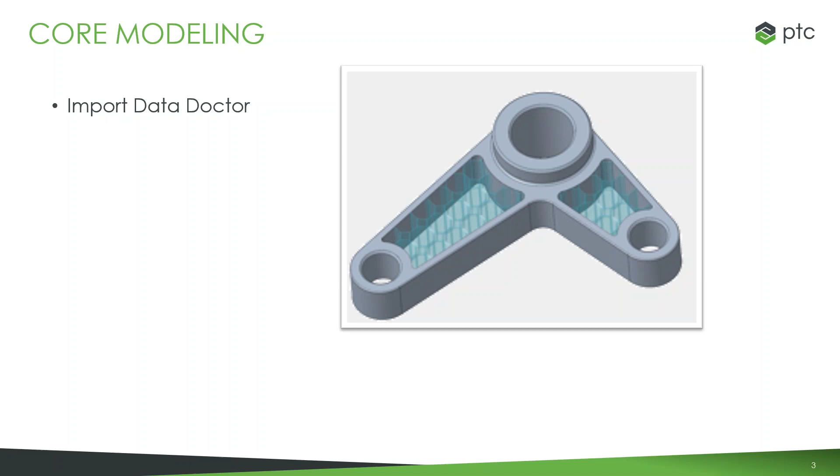We also have new display filters for our geometry representations. This could be utilizing the new multi-body capability we have in Creo now. So if you wanted to, say, display a lattice that you have here in the middle of this feature, and you want to make the rest of it a little bit more transparent, you have a lot of options to do that all the way through your part.

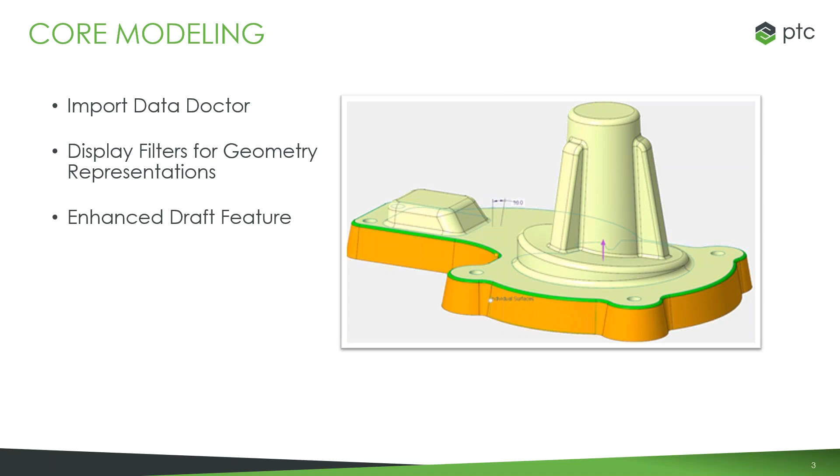We've also made enhancements to things like the draft feature, and that includes drafting already drafted features. So if you have those features already drafted, you can go ahead and draft right on top of them. And we also have the ability to detect existing draft angles in the model, so it's easy to work with and even modify later on.

And finally, here we have improvements to the performance of snapping to model geometry, or even snapping to a grid. Those are different workflows, where if you're working with that geometry and you really want to snap to those edges or certain features, or if you want to turn that off or on, it might change while you're working, so you have the ability right in the quick menu to switch between those if you need to.

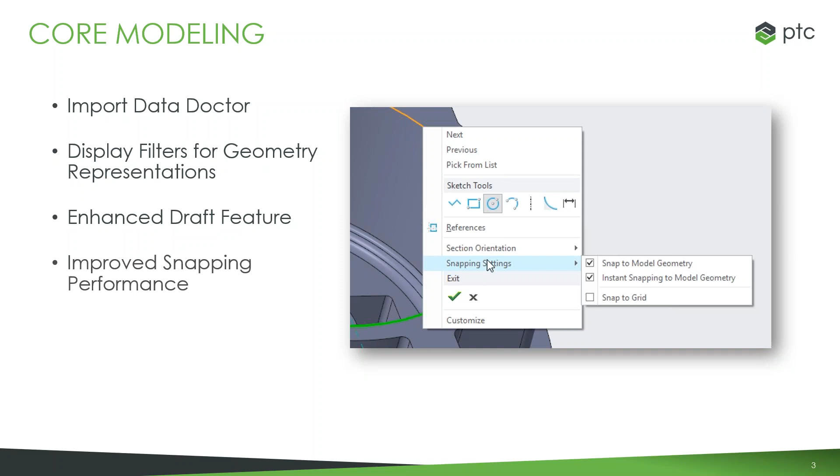And moving forward, we've made enhancements to the mirroring tool in that sketcher. So it makes it very easy to grab things and mirror. You can now essentially grab any straight sketch and use that to mirror about. And if you want to change that sketch around, move around the dimensions, that mirror is going to update for those changes. So you can set it to update or set it not to.

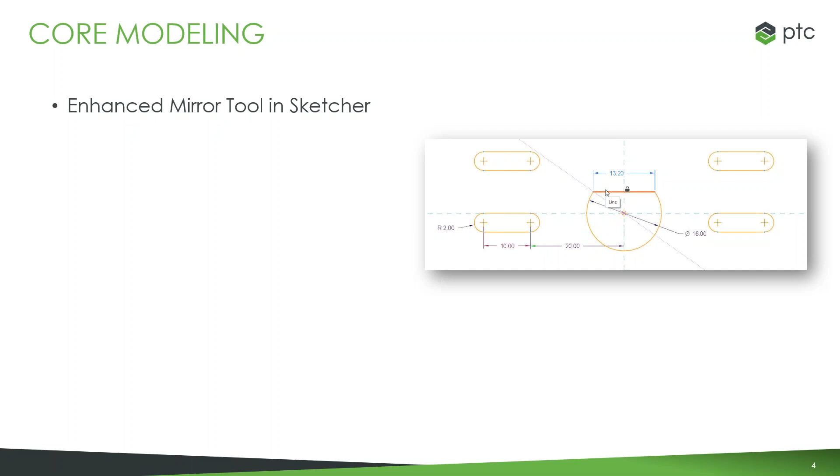We have now improvements to the visualization, just in general, of your design intent in the sketcher. We've improved the look of our relations icons. We're able to highlight certain references, change colors, really just modernizing the look and feel to working in that sketcher to better display that design intent throughout.

And then in the edit dimension section, you're able to set the appearance of your sketcher constraints. So when you click to edit those dimensions, also show the constraints. So that's just a config option that you now have the ability to activate there. So really, there's a ton of different core modeling capabilities that we've updated, but just a couple of them to reference on for you to see a little bit into that.

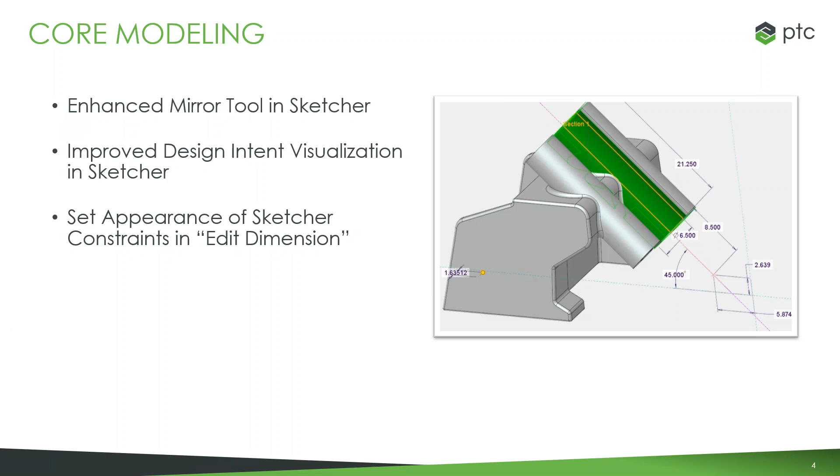But what I want to move in now is to look a bit more into the applications. Starting here first with Creo Simulation Live, aka CSL. And if this is something that you haven't seen or even worked with before, this is a tool that we've developed as part of our partnership with ANSYS to put real-time simulation right into the modeling environment. So it's not some other software or another window that we have to jump over to work with, it's something that's available to us right in the modeling environment.

And this was introduced with Creo 6 and actually backported into Creo 5 and 4 as well. But we've really been working on this and making rapid enhancements to it over the past year, and I can touch on a little bit of that right now.

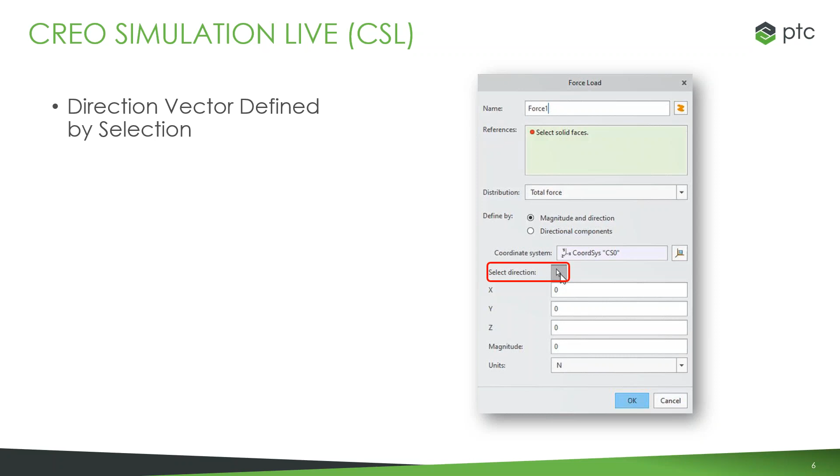First thing that we've added is the ability to control the direction vector from a selection. So it doesn't have to be a default and we don't have to type in all the X, Y, Z. What you can essentially do is, if you want to apply a load, you can say, okay, let me just simply select right on that face or right on that edge or whatever it is, and then it's going to, by default, fill in all of those direction vectors for you.

And building off of that, we're now not locked to working with the overall global coordinate system. You can create and select any coordinate system to define those load cases from, so improving the general ability to define those loads from the start of the study.

Also made enhancements to the legend, specifying what you want to look at, how those values are displayed, especially for setting things like the upper and lower bounds for the values that you're displaying. Works a lot better now. It really works well with things like composite views where you're only displaying values within a particular range on that legend.

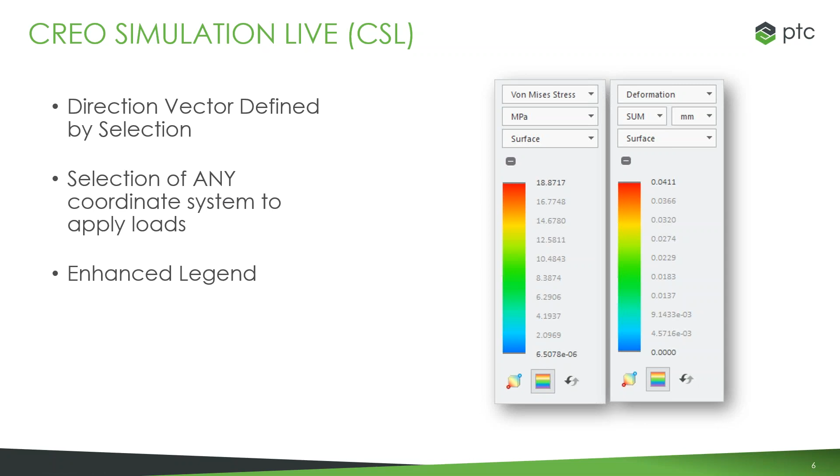So say you're showing your model, but you only want to see values that are between 14.6 and 8.3, you could go ahead and move those down, and then it's making the rest of the area transparent or basically see-through and only showing the values in that particular region. So that's a really useful tool there, specifically when you're building out your designs.

We can also use values that we get from our simulation probes in CSL and use them in our behavior modeling studies. If you haven't worked with behavior modeling before, this is something that allows us to take values like your maximum von Mises stress or the displacement that you're getting from your analysis and begin to kind of optimize around it,

where we're telling the system certain dimensions that it can change, and the system goes through and automatically optimizes the model for us based on what you allowed it to change. So working with those variables, it's a really useful way to use those analysis results we're getting back from CSL.

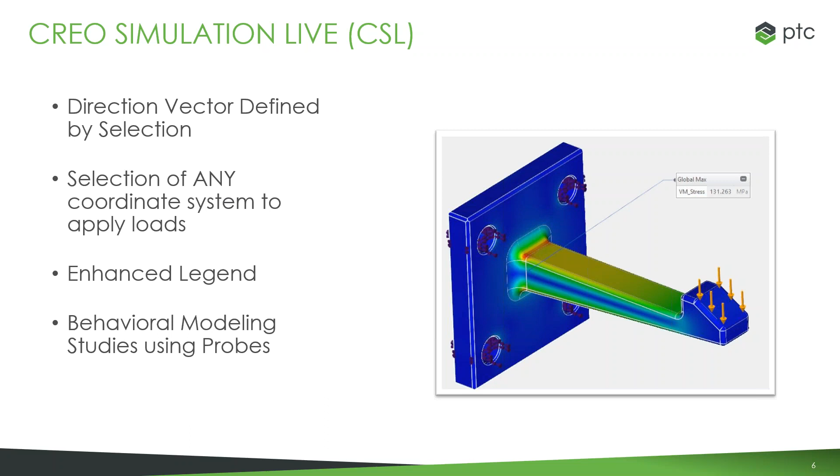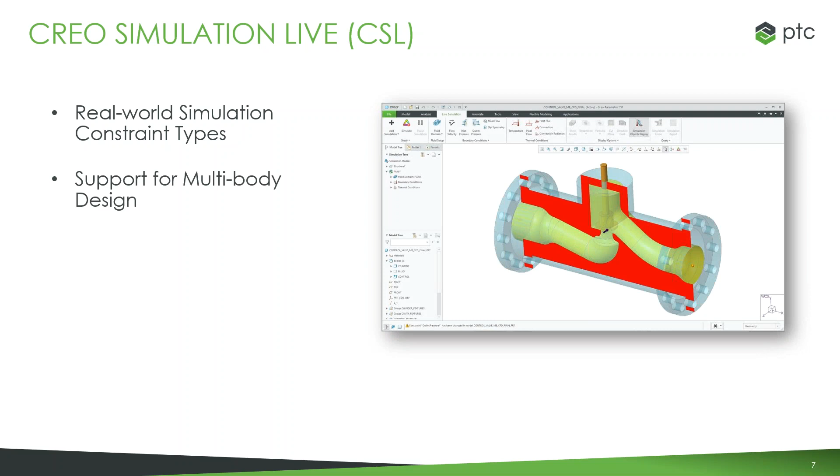We've added more real-world simulation constraint types as well. So things like ball, pin, planar constraints, just helping to make more of those cases more realistic to the problem or the situation that you're trying to design around. And CSL now also has support for multibody design. There's a ton of different applications of that, things like cavities, internal, external volumes, domains, and much more around this.

And then specifically to thermal studies, we can now do transient studies, aka time-dependent analysis. Allows you to see how the values are changing over the course of time. So now you can either do steady state or the time-dependent study, depending on what you want to look at there.

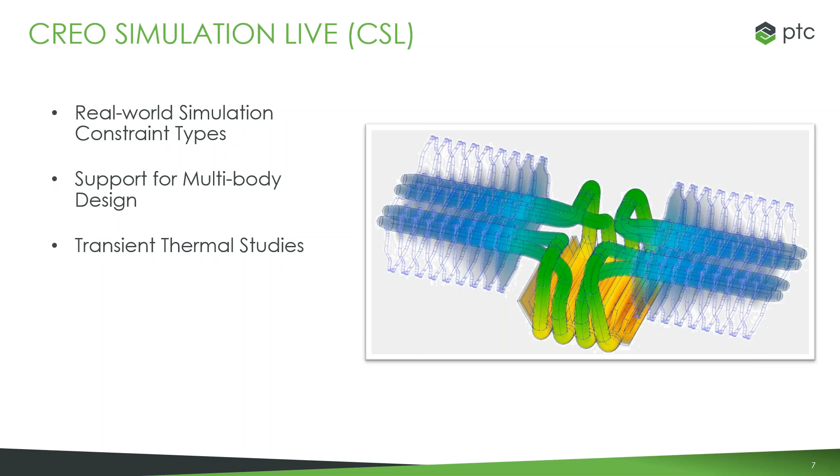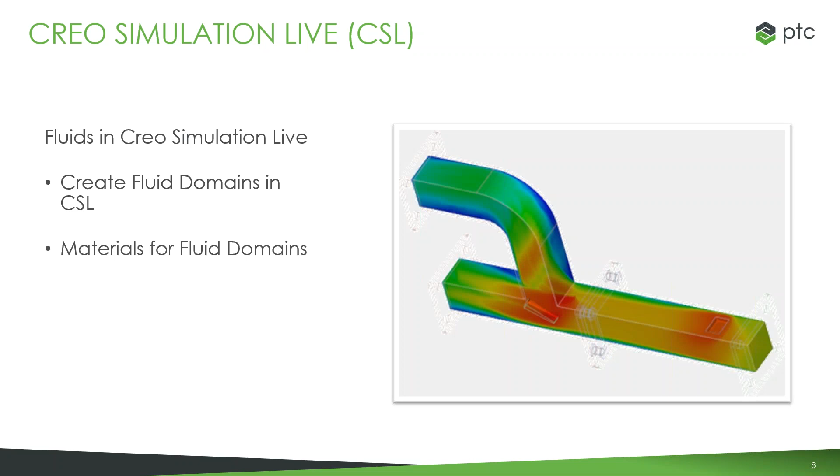And moving on from there, probably the biggest change to CSL with the release of Creo 7 is the option to do flow analysis in the same way that we do for structural, thermal, modal, where we essentially begin by creating the fluid domains, whether that's internal or external, which areas to include, the inlets, outlets, specify the materials for those domains, and from there being able to visualize it right on top of the model that we're working with. And that's the idea here, is regardless of whether it's an internal or an external case, be able to visualize it right in the modeling environment.

And along with that, there's a ton of different options for the results that you're getting. Visualize the streamlines, the particles, take section views, direction fields, set probes. It's really a powerful, but at the same time, very easy to use tool for doing that type of flow analysis. It's not something that we have to send off to the expert analyst to maybe get results back later. It's something that we can do right as we're working, right in the design environment.

And so it's one thing to talk about that and say how great it is for visualizing, but it's probably a lot better to actually see what that looks like in the context of Creo. So we can hop over and go through a brief demonstration of what that looks like.

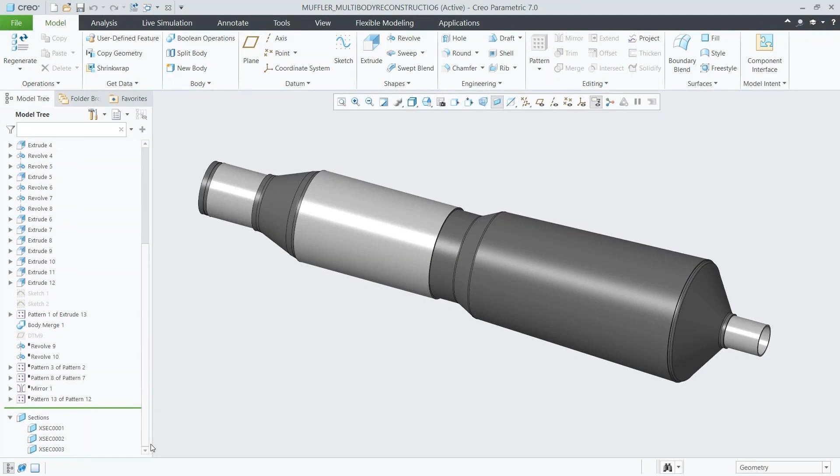So pulling up the part that we're going to be using here for our demonstration of the flow analysis in Creo Simulation Live, we're going to be working with a model for a muffler off of a motorcycle assembly. So this part actually came from one of our customers, Royal Enfield. So this is the muffler off of one of their data sets. What we'd like to do is simulate some of the flow that's happening within this system. So we can go ahead and open this up to see kind of what we're working with to start. And there's definitely a lot of great geometry in here that we're going to be able to utilize and begin to change around as we go further.

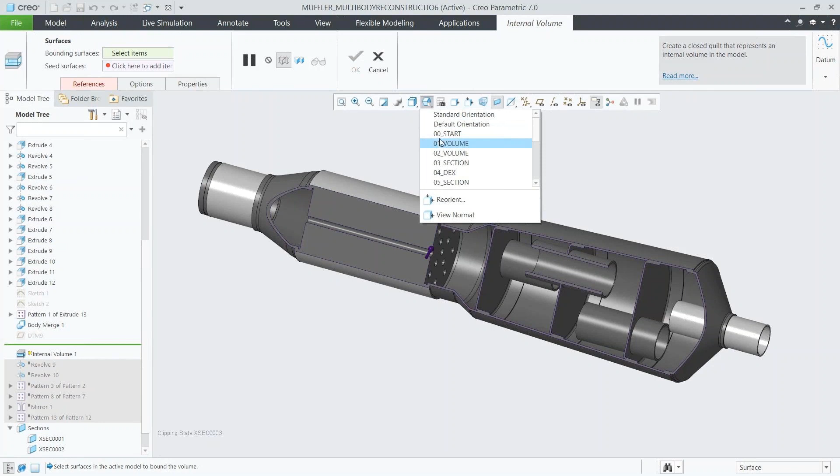So to start into that, we'll simply go right up into the top, into our live simulation tab, and click to start into a fluid simulation study. And the first thing we'll lay out is our fluid domain. So the fluid domain is the volume of space that our fluid flow is going to be contained within. If we want to do that, we'll first begin by defining here for this internal flow example, the inlet for the study, the outlet where it's leaving. And what the system does is it automatically builds out that internal volume for the model. And once we accept that, it appears down in the model tree, and it's something that I can go back to, I can make changes to later on if I'd like to.

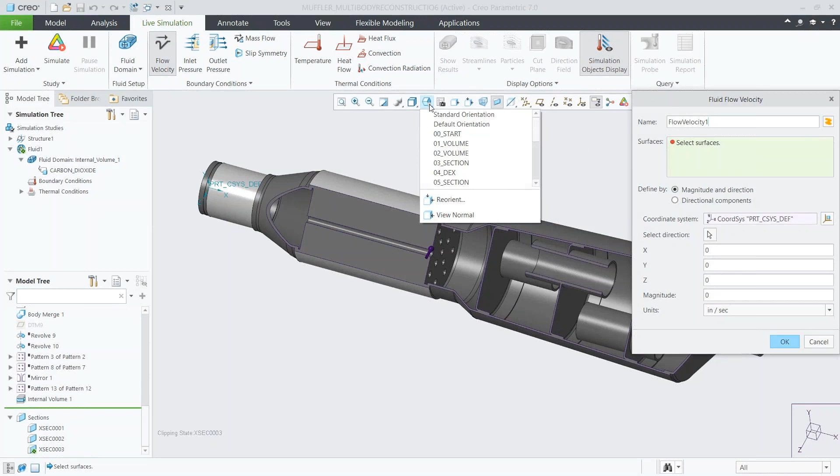And from there, I can define my fluid material that I'd like to analyze. So we have a few base options laid out here that we can select through. And I'm going to start here with carbon dioxide. This is going to be a really close approximation for what's going to be coming out of my motorcycle. So go ahead and select that. Next, we'll give our study a fluid flow velocity for my muffler. Essentially, how fast is this going to be coming in from my motor? Specify the surface I want to work with, set the direction, set the magnitude from my options there, and simply lay that out.

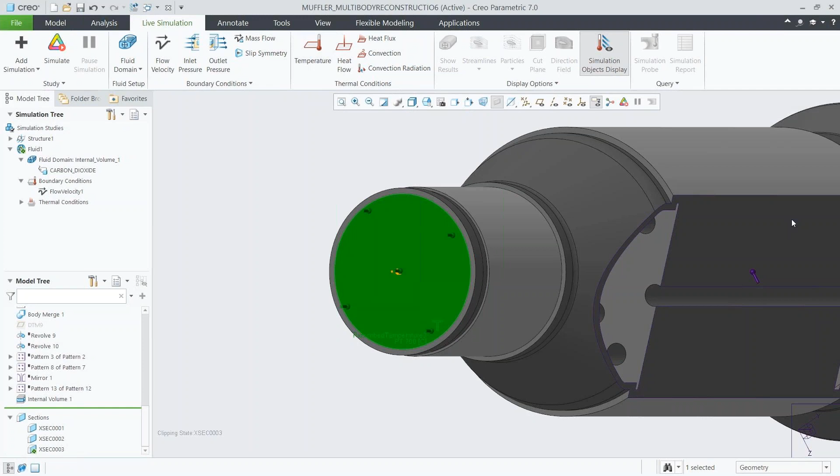And now that I have that flow velocity set up, I can go ahead and set some thermal conditions as well, such as the prescribed temperature at that inlet. And around that, set the values, set the unit, whatever regular operating temperature that might be around that motorcycle exhaust. Now I'm pretty much happy with the initial conditions I have at that inlet. So next I'll define an outlet pressure for my muffler. So move around to the back end. And for my case, I'll just simply set it to 0, essentially just outside air.

With that, I'm pretty much ready to jump into the study. We do have a couple quick options that I could go through and change here for my simulation quality. I can slide it all the way over to the left for the highest speed, keep it all the way over to the right for the highest accuracy, or maybe somewhere in between. In this case, I want it to be at the highest accuracy. With that, we can simply go ahead and click to simulate.

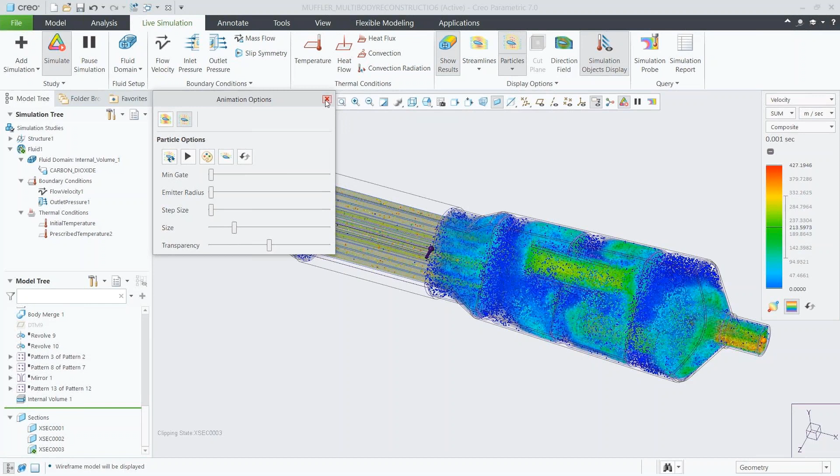And with that, we can essentially see as soon as I click to run the simulation, we're getting results back. It's really that fast. I can hop over into my legend, and if I only want to see the velocity within a particular range. Also have different display options that I can choose from to visualize the flow of individual particles through this. And with those particles, even more options to change the size, change the transparency, really getting this looking the way that I want. And so it helps me understand exactly how that flow is working, depending on how I set up my model.

All right, those particles are one really good way to analyze the flow, but we have other ways as well. We could look at a direction field, which essentially acts as a cut plane that I can use to see the direction everything's going in. I can move that cut plane around to different parts of the model. Here I'll pull up our dragger tool, and we can use that to change it around, just check out different areas, see the direction that my fluid is moving based on how I defined it. So it really helps me to interrogate certain areas, even type in specific values for that section view as well.

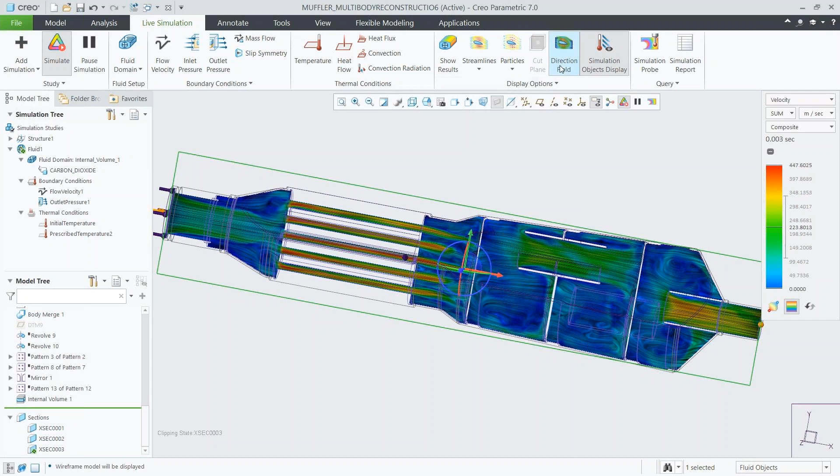As we can see, there's a lot of different ways to visualize those results. But on top of that, also analyze and begin to build off of that. Starting here first with one of our live simulation probes, what that allows me to do is see different values in my model. See the maximum velocity maybe that we're getting down at our outlet. We can see how that changes over the course of the flow. Along with that, we can see those values. We can see a graph for those values, really helping us to understand what's happening down at that outlet. There's other options we could view through as well. So you can see pressure, temperature, vortices, and now these are all going to be things that we can begin to design around.

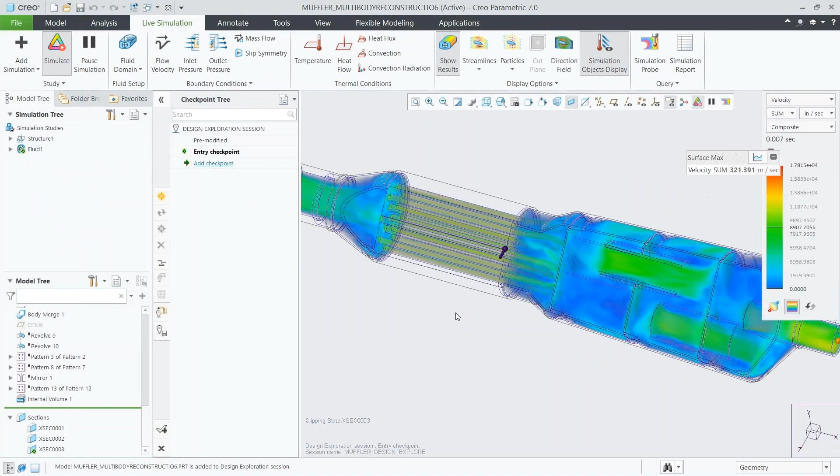And one of the ways we can do that is by working in the design exploration session. And this is our tool in Creo for trying out new designs, iterations, branching off of existing designs. And instead of how you would normally do it by creating lots of copies and doing save as all the time, we're working right within this exploration session, where we're starting into this with a pre-modified version of the model. And as we start to go through now and make changes, instead of saving off different copies for that, we simply just build out checkpoints at any place that we might want to build back on.

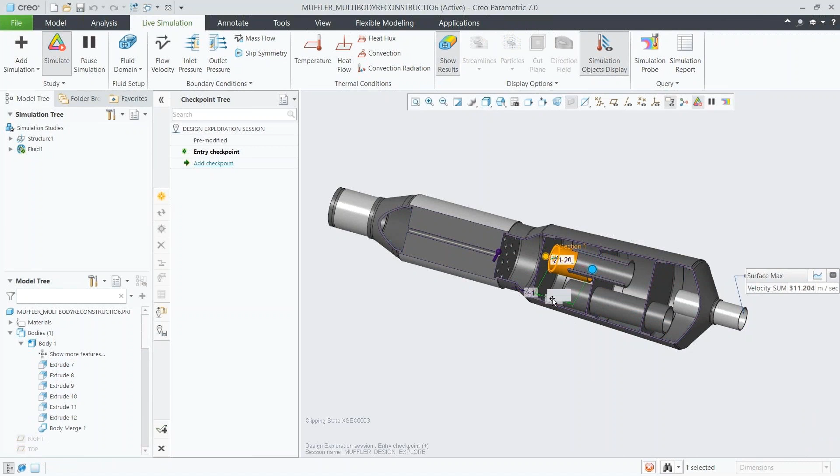In this case here, we have these internal baffles. What's going to happen if we want to take them and maybe make a couple of them a few inches longer? So even though we're in this design exploration session, we have the flow analysis running, we're still able to do this standard sort of CAD Creo work that we're used to.

But the difference is now, as soon as I make that change, we're getting instant insight into what that does to the analysis. You can see the particle flow, see where the velocity is increasing or decreasing, especially important down by my end velocity, down by the outlet. We can check that probe, see the graph of the velocity. Again, this isn't something that I send off to hope to get results back by the end of the week. I go through, make the changes I want, and I get to see the results right in my environment.

Like I said earlier, if you want to go through and build out a checkpoint with that, show that I increased the length of the pipes there, we can go ahead and do that with the use of the design exploration. It's keeping track of all those changes I'm making. What that allows me to do is keep making changes to my design. So maybe in a past design, I built these pipes with holes in them. Well, now I want to see how that design would work if I activated those holes. So right in the model tree, I'll activate those, and immediately we can start to see what that does to our results.

So we can see we're getting a different flow, how that's changing here. We clearly started to increase that outlet velocity, but we can check other values too. Maybe switch to a composite view, check the velocity moving through the pipes, check the pressure, see those pressure drops. Looks like we started to smooth out the pressure flows throughout the model.

Here we can go through and see a lot of different areas in the model, but similar to what we did with the direction field, we can also take true section views to see what's happening in different parts of the model. Let's switch around to the back and take a closer look into the flow going through some of those holes we added into the pipes.

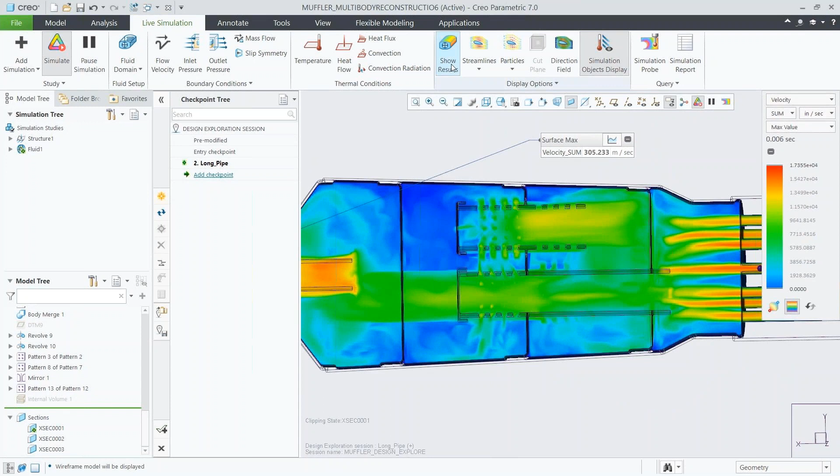So we can see the difference with that, change it over to the direction field. We almost reversed the flow through those holes in the baffles. I'm definitely happy with some of those changes I made so far.

And to capture some of that design intent, I'll make a checkpoint to show right where I was when I made the changes for those holes. Something I can check back on, switch between different checkpoints, really starting to capture the work I've done throughout this design. From here, I'm pretty much happy with where I'm at towards the outlet.

Now I want to direct my attention more towards the beginning of the flow. Right now we basically just have a solid cylinder with a bunch of pipes going through it, but I want to change up that design. First we'll clear out that feature I have right now, and instead start with more of a clean slate that I can build on as we go.

We can also use one of our multi-body commands here to quickly remove that body from the model. And with that area now cleared out, we can begin to build out some new geometry there.

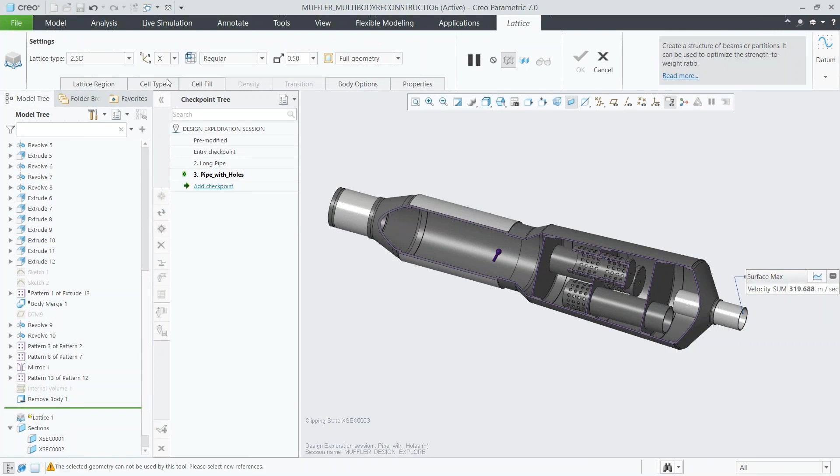What I want to do here is add a lattice feature to regulate the flow through that channel. This might be something we're creating using additive manufacturing, and there are really a lot of options to start with. With this lattice, we'll first begin by specifying the surfaces or area we're going to use to define where that lattice should be placed.

This is what we call a lattice region, where we simply go through and select any of the edges we want to define that region. Latticing is a feature we've focused on over the past couple releases of Creo. It gives us the ability to create really robust, complex structures that have a lot of different uses, especially if you're working in the world of 3D printing.

So we quickly go through, define the coordinate system, state where that first cell should be located, and then define what that cell shape will be. There are a lot of different 3D shapes for these lattices, so kind of like what we're doing here with more of a 2.5D shape in the shape of a hexagon.

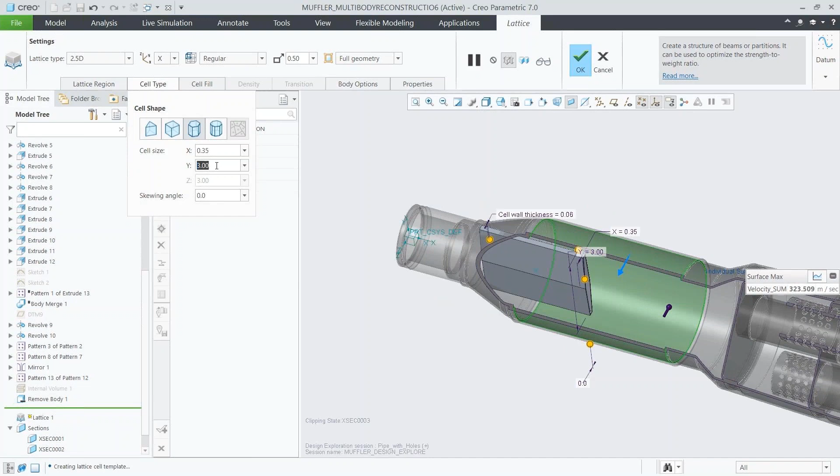If it's a little bit big, we can scale it down and go through and change whatever parameters are associated with that. If it looks a little thin, we can increase that wall thickness a bit, quickly visualize it to see if we like it, and if we do, go ahead and accept those changes.

Even though I made a fairly significant change there, you can see the analysis is already updated. Then we can analyze the effects, go back and change the display state, change the result type we're getting, maybe see how our pressure has been dropping around those lattices, if that's something we're interested in.

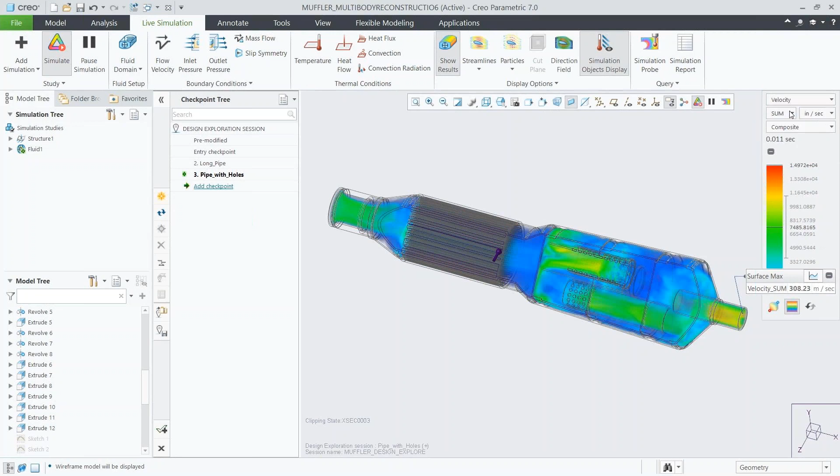We can definitely see it's a little bit different than what it was before. Check back around the velocity at the outlet of my muffler, see that we're getting maybe spikes or values changing, whatever you want to look at back around there.

Once I've had the chance to look over those results, and because I'm in the design exploration, we can simply take those values and build out a checkpoint that allows me to see exactly the changes I made in order to get here.

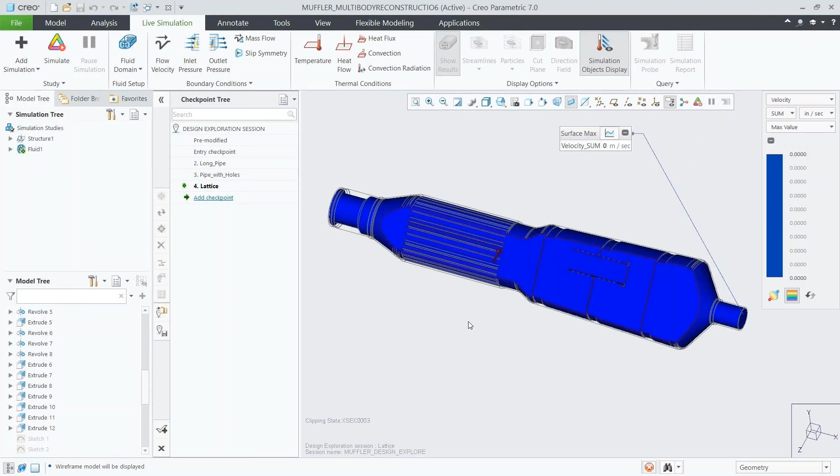And if I'm happy with where the design's at, I can choose to accept those changes. Once we do, those changes are applied to the parametric model I started the session with. And even though design exploration is a great tool, I don't have to be in Dex in order to work with this. This could even be a day or two later.

Someone on my team says, hey Paul, we need to decrease that outlet velocity. Well, I know to decrease that outlet velocity, maybe a good place to start might be around that diameter. Maybe you want to increase that a little bit. Once I make that change, we can simply regenerate the model, and then my analysis updates right along with it. I can go back, check the probe out, and see that the values I'm getting for that velocity have definitely dropped down a bit. Seem to be getting now around 240, 250 meters per second.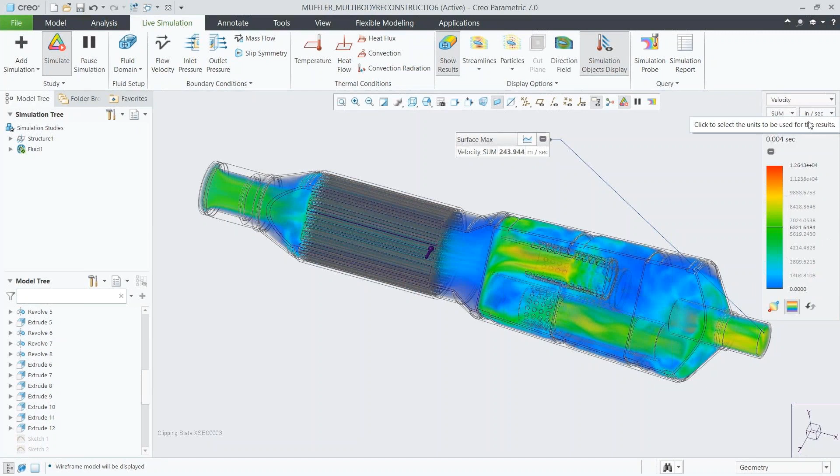And that's really the main idea with the flow analysis in CSL, is we're making any of the changes you want. Try this, try that, try anything. You don't want to limit the amount of creativity you have in your design by having to wait around for results to come back from the analysis. Now go ahead, simply build out the model that you like and immediately get that instant insight back.

So that's just a quick look at one of the examples going through in Creo Simulation Live, specifically with the flow analysis. And if that isn't something you've worked with before, there's a lot of other options with it as well. There's a structural mode. You can go into looking at thermal studies, look at vibrations. So really a lot of different options that you can get into and actually build into your design process.

Good look through there. Now next I want to move into our next section, which is going to be covering multi-body design. So this is just offering a new way to design in Creo. And this is really built out in order to enable some of those capabilities like we have in the flow analysis, where you can use things like multi-body to build out some of those inner domains or outer domains, things of that nature.

It's enabling a lot of the applications we have now. And so it changes the way we design a lot of times, where each of those different bodies can be handled differently, different materials included or excluded from your mass calculations, how you define your global interferences or clearances. There's many options using this. It's something that's going to be supported mostly everywhere in Creo going forward.

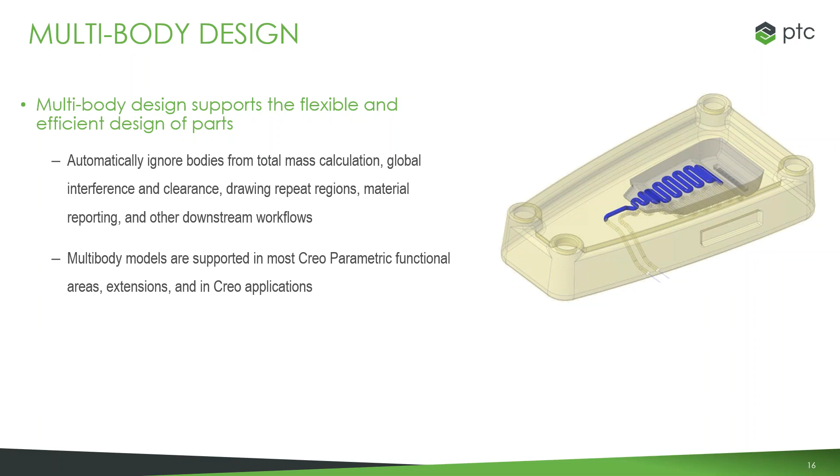And those bodies that you create, they're an entirely new object type in Creo. They appear right in the model tree under your bodies. Each of those bodies can have their own individual appearances, parameters, attributes. With each of those, we have the different operators for working with the geometry: merging, subtracting, intersecting. And once you've done what you need to do, go ahead and make part files out of any of those bodies. Something that's a really powerful way to work.

If you've never worked with multi-body before, it's definitely something you'll want to try out. For a lot of people, the standard way we're used to working in Creo is going to work just fine. It's still an awesome way to work. But for a lot of other people, this type of Boolean work where you're merging and subtracting bodies is going to open up a new world of possibilities. So doing multi-body design might get you there faster and easier for some geometry, as opposed to your typical surfacing and quilt-based workflow. Just a couple of different options there in that sense.

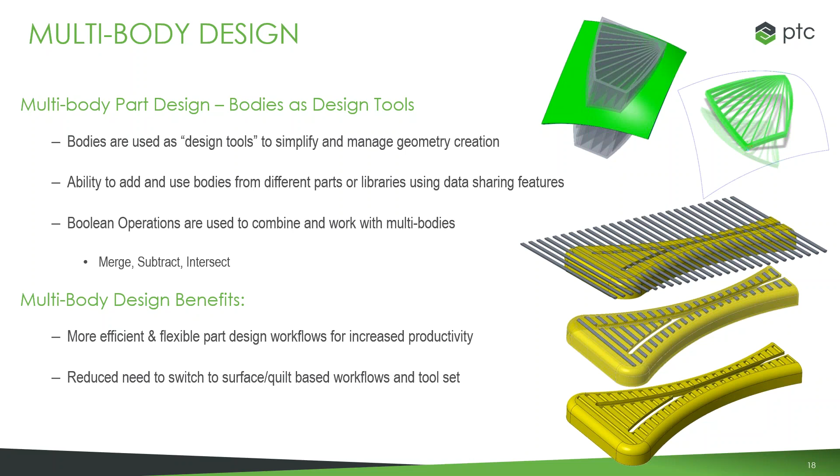And we also had improvements over in the world of additive manufacturing and 3D printing. First is the creation of stochastic lattices. We've really done a lot of work on this, worked with the solvers it's working around, and enhanced the way this type of lattice in particular follows along some of the hard edges we have in our parts, making the structures even more structurally sound. This is really useful in a lot of medical areas where you're creating things like bone grafts, or just trying to follow around particular areas. So that's something that's had a lot of work done around it.

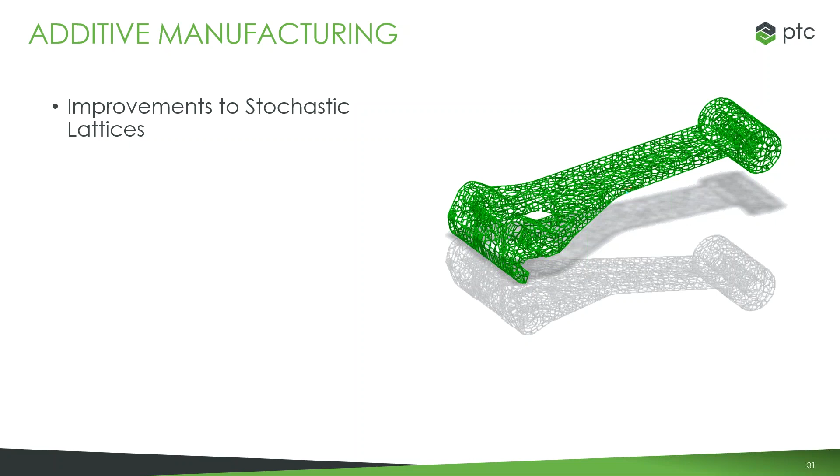Next, we have improvements to the custom lattice cell. This is where you're taking a part file in Creo and using that as the cell for the lattice. In the past, we've always had the option for full geometry, but now we've also included an option for a more simplified BREP geometry. You can define it either way, so if you're building out 10,000 or 100,000 of these different lattice cells, you'll probably want to use BREP geometry to let it propagate a lot quicker.

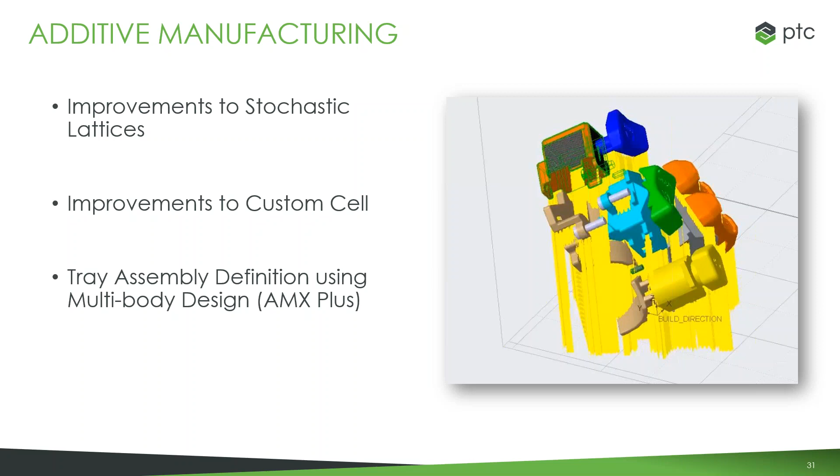Specific to the additive manufacturing plus extension, we made improvements to the tray assembly definition using that multi-body design methodology. So even within the same part file, you can have different bodies with different parameters, wall thickness, colors, a lot of different uses in that sense.

On almost the opposite side of things, in subtractive manufacturing, we also made improvements. In the machining world, we now can view synchronized toolpaths right in the graphics area. We've always been able to synchronize those toolpaths, but now there's a synchronization menu where you can highlight what you want to see, view them, and keep track of it right in the design environment.

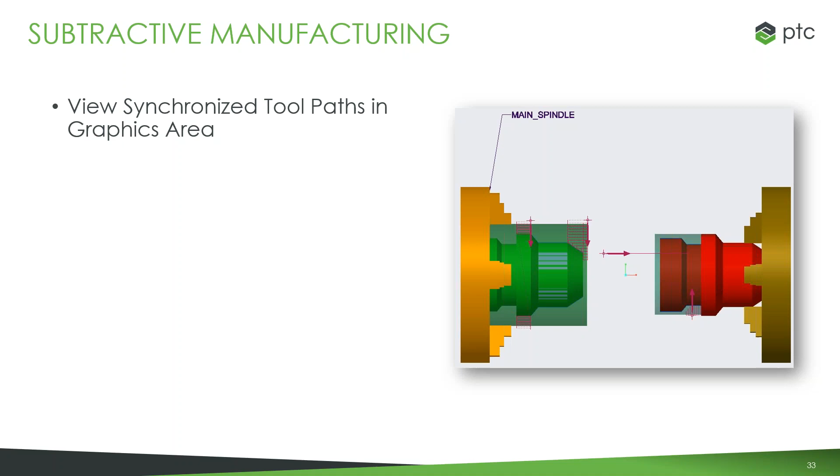We've always had go home commands, but now some machines need multiple go home positions, especially if you have mill turn operations where you have both operating at the same time. You could have home 1, home 2, whatever you need there.

And finally, the ability to explicitly call out Swiss turning operations. This is helpful if you have a mill turn machine — you can fix the z-axis, put all the appropriate CL commands into the output file, and that's a function of our complete machining suite of tools. If that's something you work with, definitely a welcome addition for those machining capabilities.

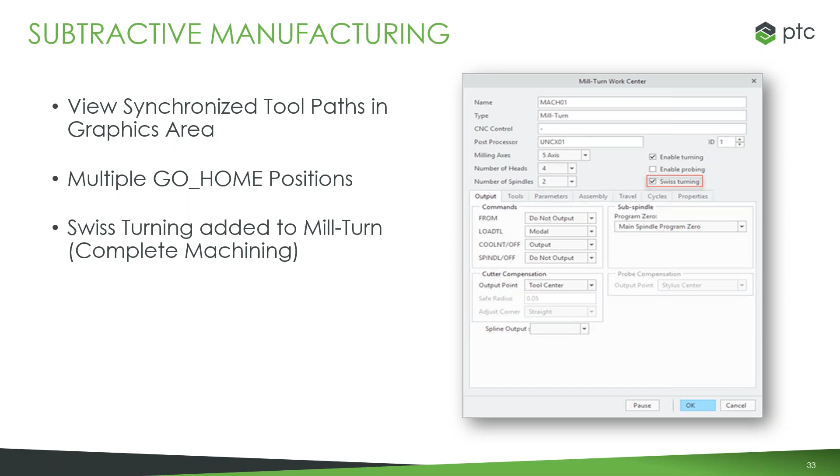Moving on, we've also made changes continuing to support the work we do in detailing and how that relates to our model-based definition. This is really a forward movement in the world of CAD today, taking a lot of the information typically done on the 2D drawing side and building that into the 3D models that define those. We have a lot of really good work being done around that.

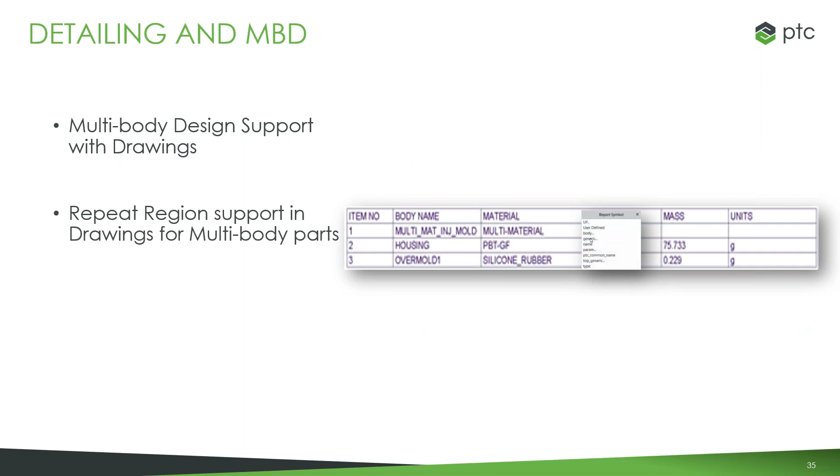First, we've included multi-body support in our drawings. If you have different bodies with different materials, even in the same part, you can create different cross-hatchings to differentiate between them. We have repeat regions in drawings for multi-body parts, so you can exclude certain bodies and include others in your tables. In the drawing tree and drawing model tree, you can control those different bodies, identify them, hide them, and keep it all straight.

We can now configure drawing view tooltips, so if you click on a view, you can see what the part is, the model, the combination, or explode state. We also have a new summary view command where you can click on an element and have the system tell you about it — a good way to understand the design intent, especially if it's something you haven't worked with in a while or even if you weren't the one who created the model.

We have improvements around the addition of drawing tree columns, so adding those in is now an option. Along with that, you can support and sort the drawing tree by view models and by parent views, so you can build out the drawing tree however you like.

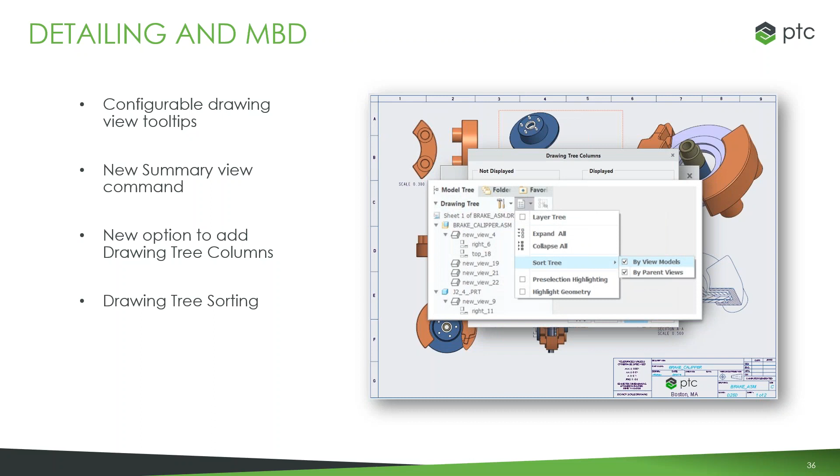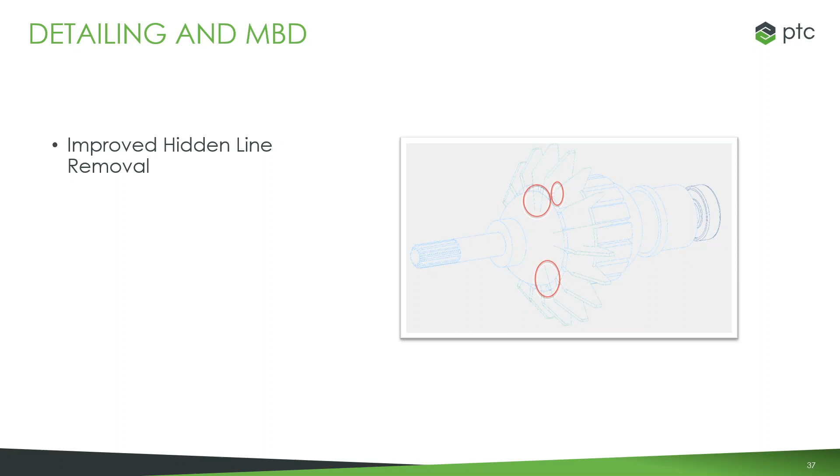Next, we have improvements to removing hidden lines. If you have a view where you want to remove some of those lines, it's much easier to do now. You can also move the arrow with the name, so there's a link between the two — whenever you move the name around, the arrow will follow, or you can break that link and have it be separate if you like.

Right. And so also with that, we have the ability to add multiple leads. This is an option where you can have multiple normal tangent leaders all coming off of that one GTOL or that tolerance. So it's really helpful for creating those and creating notes, symbols, anything that might be referencing separate areas, but you want to have it linked back to that same part of that same feature that defines them.

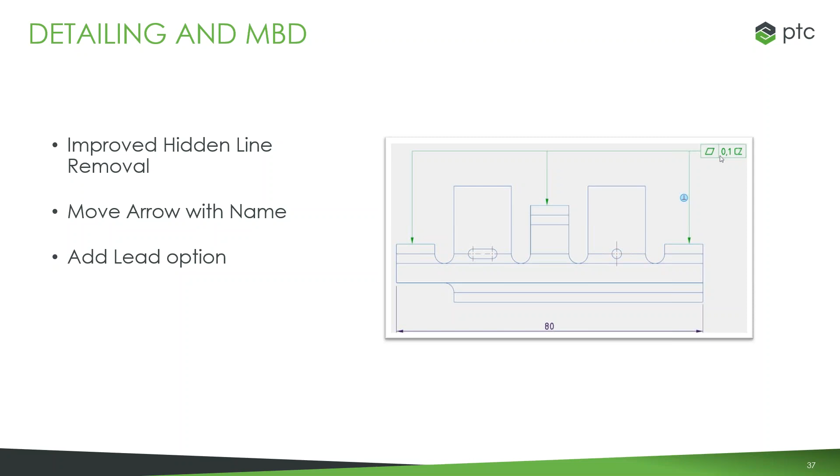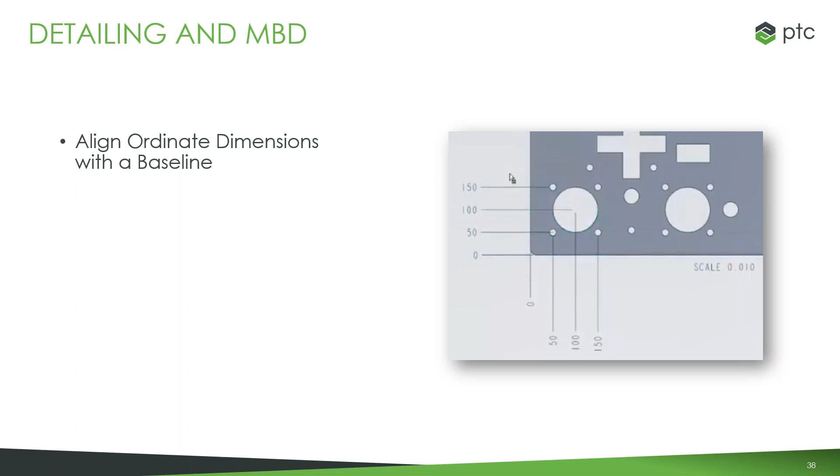All right, so next, being able to align ordinate dimensions with the baseline. This is something that you're going to run into if you're working with the ANSI standard. That's how they like to do it. So we built out those ordinate dimensions to work well with that baseline. We can control the length of intersected contours. So beyond that base intersection point, you can enable intersection witness lines to kind of guide that.

And then we have our child view identification. So it's very easy to see where your drawings go. It's especially useful if you're working with a multi-page drawing, or maybe even again, if you weren't the one that created that drawing, it's helpful for keeping it all straight and understanding exactly where everything leads to.

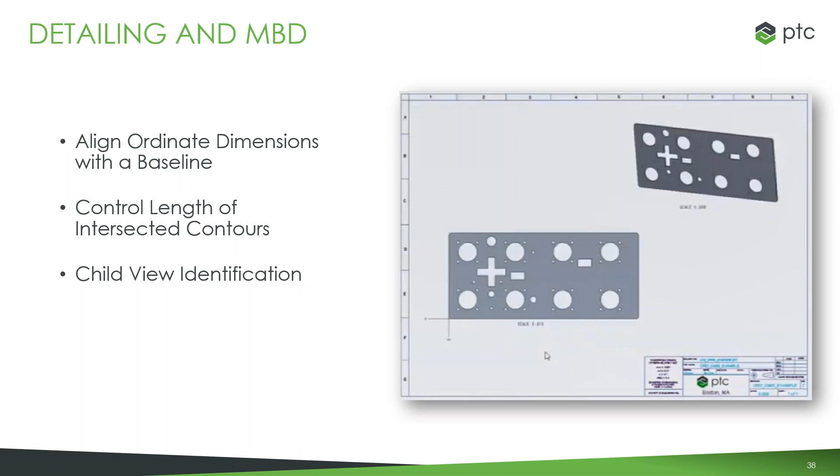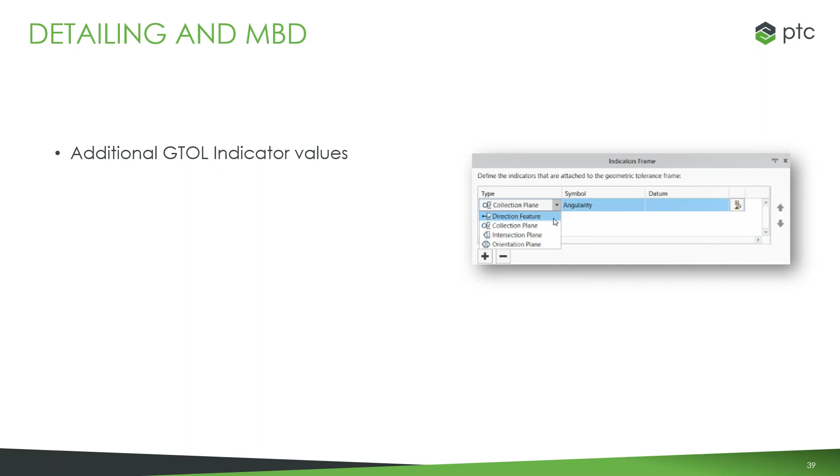And we've continued to make improvements around GTOLs. So now additional indicator values, things like intersection or collection plane for angularity. In that case, it's working more in the ISO standard. Also have options for controlling the gap between your GTOL and the indicator frames. So depending on the standard that you're working with, maybe if you're working with ISO 1101, 2012, or 2017, you have different options for that potential gap size.

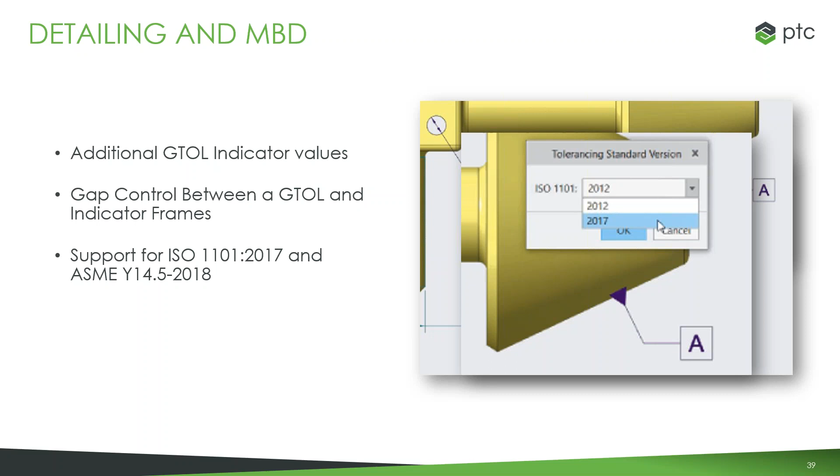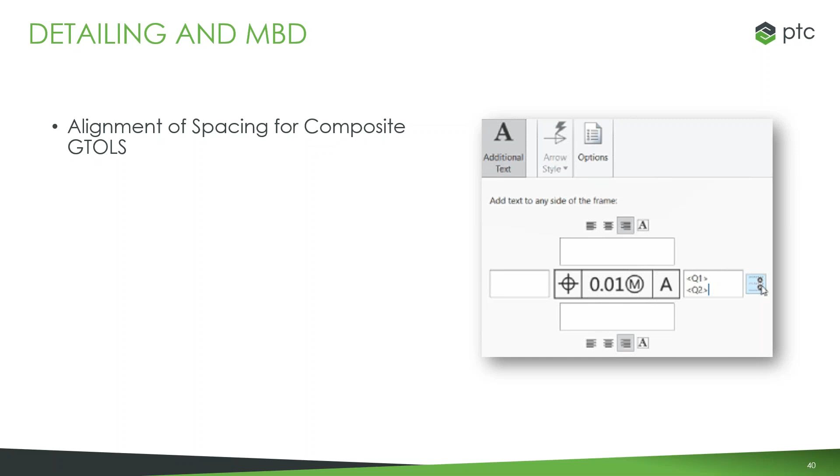And around those standards, as they keep getting released, Creo is going to keep evolving right along with them. So now we've included the support for ISO 1101 2017 and ASME Y14.5 2018 as well. We have options for the alignment of spacing when it comes to our composite GTOLs. So depending on how you want those GTOLs to align on the left, on the right, that's all done keeping up with the standards.

Added in some new symbols to the symbol palette, particularly the angularity symbol for an intersection plane. We have the runout symbol for a direction feature and symmetry symbol for a collection plane. So if you work with any of those, that's a nice added feature there. And finally, we've updated the parser for our syntax checker. Again, taking into account those new standards, making sure it all works.

So this is something that a lot of people in a lot of different industries are starting to work towards, is really building a lot of that information around tolerancing the dimensions and a lot of things that were normally created in our drawings. Now we can have that all tied in with that model and have a lot of really rich content around that. So we're always going to keep building that out as we go forward.

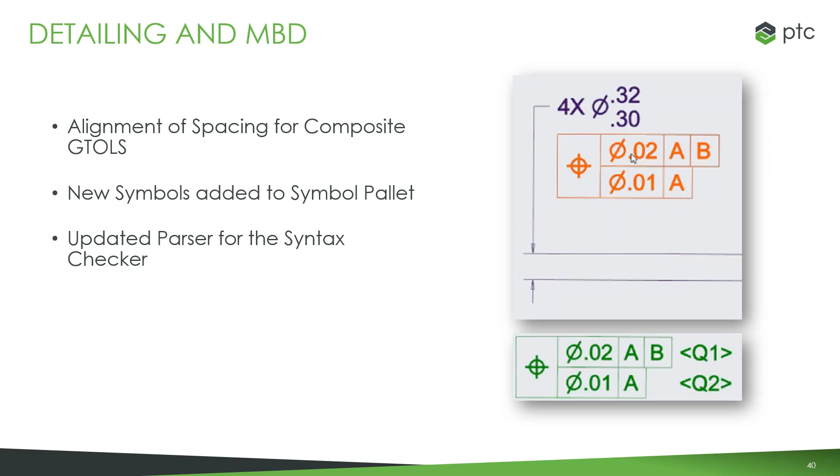And so touching now back on a different area here is generative topology optimization. So this is one of the biggest developments with the release of Creo 7, the introduction of generative. In short, it autonomously creates optimal designs from a set of system design requirements. Within Creo, you're able to specify requirements and design goals, and the generative engine is going to automatically produce a manufacturable part, either maybe as a starting point or maybe even as a final solution.

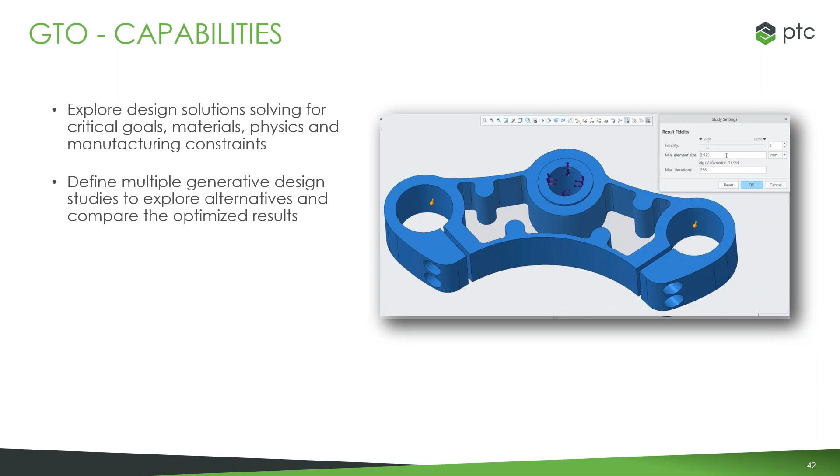And that allows you to try out a lot of different things, different materials, different physics, manufacturing constraints, and automatically generate that geometry. It allows you to try out many different generative design studies to explore all different kinds of design alternatives and compare the results between each of those to work towards the most optimal design. You're able to visualize all of that generation in real time. And even whenever you're modifying your input geometry or changing your design criteria, go ahead and run right back through that.

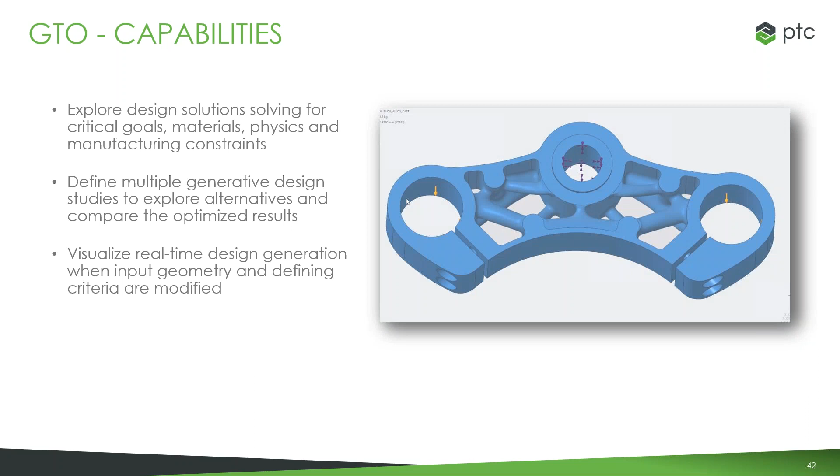And that process allows you to interrogate and review all of the analysis results you get after generating the model. So see what your stress values are, what's the deformation, and as you start to get those results, you can go back through and change around those design constraints, any of the geometry, try different materials, and see what that does to the model and what kind of geometry you're getting.

And we're really able to do this because it's all integrated right in with Creo. We've integrated this frustum technology that's the base for it right into the modeling environment. It's not some separate window or software you have to switch over to. And all we do is define the geometry, say what we can change, say what things we can't change, any constraints, and just let the system go.

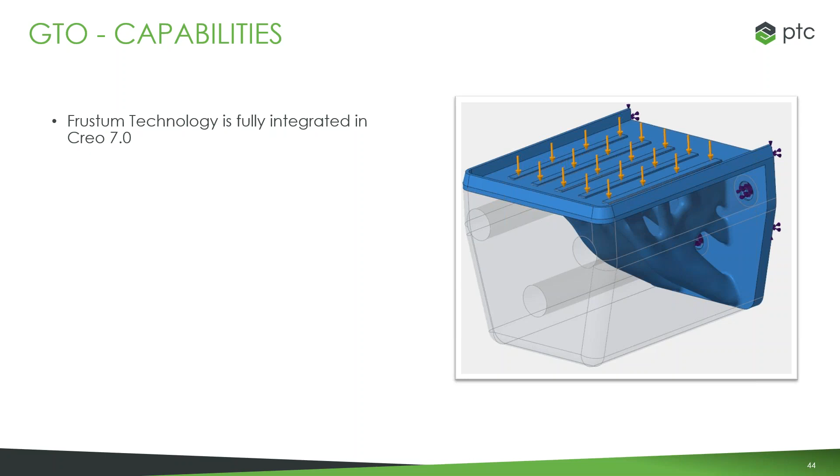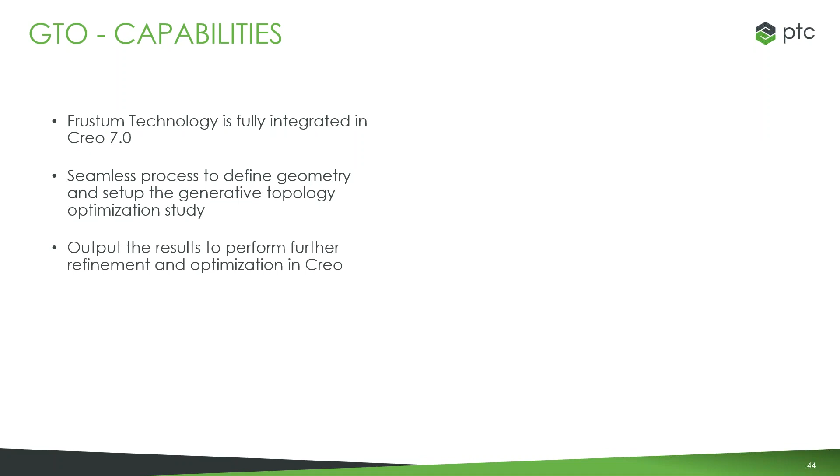And once the system generates that design and you've had the chance to review it, go ahead and output the results to use elsewhere in Creo for further refinement and any optimization you want to do. And so to do that, we can take that design and convert it then into BREP geometry. So in that process, you have different options for how the model is reconstructed. You can go back and forth between the two, see what's changed, really do that to get the best model possible, and at the same time, with manufacturable geometry.

It's one thing that's nice to look at that tessellated version of the model that you couldn't actually create, but what you can do in Creo is really take that geometry and build it into what we call curvature continuous. And so it's actually manufacturable geometry that you can create once it's time to go ahead and manufacture these parts. And what we can do here is jump into a brief demonstration to kind of show what that would look like here in the context of Creo and specifically 7.0.

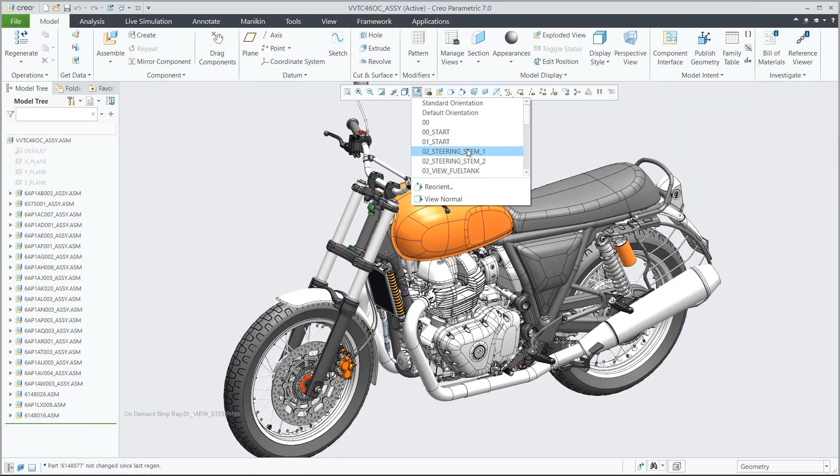Right, and so here's our model here that we took our muffler off of earlier, actually. So this is coming from the data set we have from Royal Enfield. This is one of their first motorcycle designs. Specifically here, what we want to look at is up in this steering mechanism. We have this lower yoke. And right now, it works perfectly well.

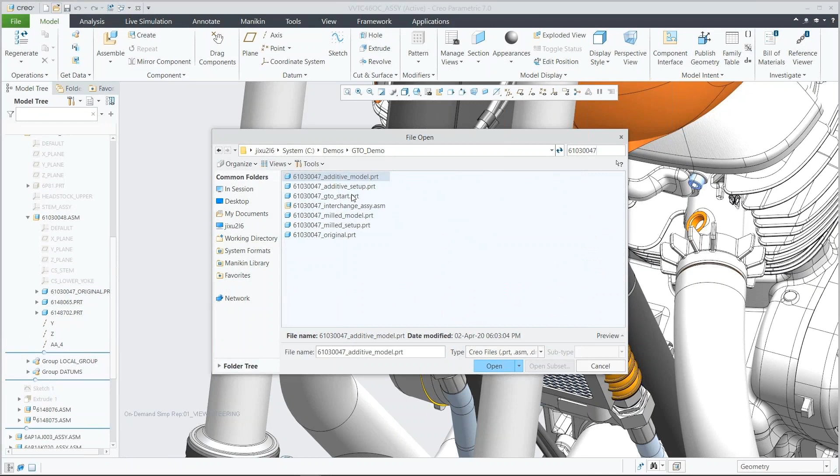But maybe I want to cut down on some of the material costs around it. I might know some of the design goals I'm after, but I'm not exactly sure how I'm going to get there. Well, that's a perfect candidate for generative topology optimization. So what we can do is go ahead and open up our part that we want to use to get working. And here we can see I have that same yoke part, but a little bit more of a simplified version of it. So this is going to be the base that I'm going to begin to work off of.

So the first thing I can show you is the start, kind of the overall envelope of where our generative part is going to be contained within. And then the other part here that I have is my preserved geometry. So that is more of the area that I want to keep. So once this design's built out, this is the area that I want to make sure is part of that end model. And what we're going to do is really build out in the middle of that.

And if I want to begin to work with it, simply head up into my applications tab and go into our generative design. And here's our general interface that we work within. Again, it's not some other separate module we jump into. It's right in the context of Creo, in the same general UI that we're used to. And so we can go ahead and select our starting geometry, which is going to be that overall envelope we saw. And then we'll select our preserved geometry. Again, the areas that we want to make sure are going to be included in the final design.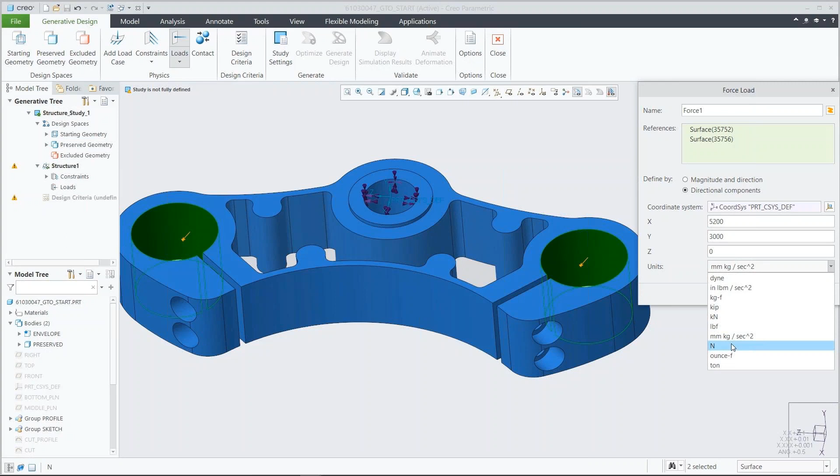And from there, we can lay out some of the physics. So we can first lay out where it's going to be constrained down. Maybe there's going to be a pin going through there. And then the loads or the forces that we want to look at here. So over on these outer yokes, go ahead and apply whatever force that we're looking at there. Go ahead and type in any of the magnitudes, the directions, units that you want to include with that, and go ahead and keep moving. So that's essentially the base there, and then we need to decide what we want to design around.

Well, in my case, I want to be able to take weight out, so I'm going to go ahead and fill just about 2/3 of that volume. And once we're actually building out to decrease that weight or decrease the volume, we're going to have some design constraints. This could be manufacturing constraints where we need to take into account the build direction for additive manufacturing, maybe a parting line if we're going to be doing a cast, or it could be more of a geometric constraint.

Here in this case, I want to use the planar symmetry. And what we're doing there is just making sure that everything that we do over on the left-hand side is going to be the same as what's happening on the right-hand side. And finally, we'll select the material that we want to work with. In this case here, we're going to be using an aluminum alloy, and that should just about cover everything we need in our design criteria.

Final thing I can look at before I go ahead and run the study is some of the settings. So we have options for the fidelity to optimize on either speed or detail, minimum element size for our mesh, or even a maximum amount of iterations that we want to run. And with all of that laid out, everything's ready to go. All we need to do is simply go up to the top and click to optimize.

So now the system is running through and taking all those physics, the design criteria, and it's automatically building out our design. We can visualize all those steps real time, and from there, analyze the results we got from the study. So here we can see right on the model, take a look at the von Mises stresses, see exactly where we're getting minimums, maximums, move up on top of the model maybe to see and check where our hotspots are going to be, right up in those corners.

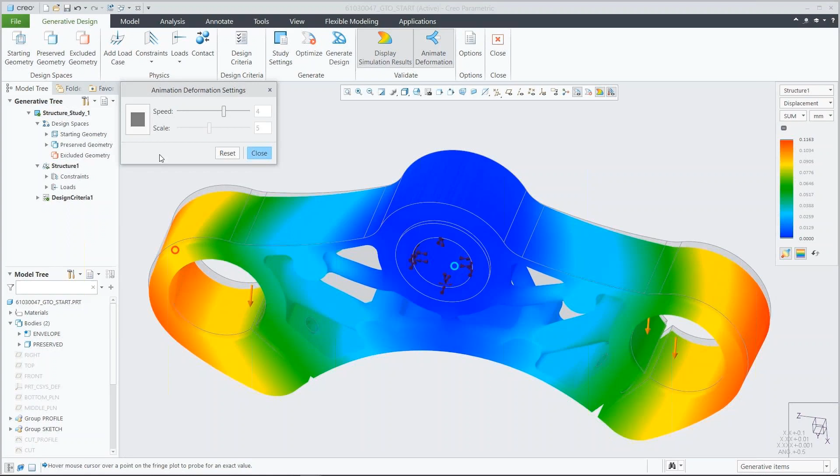Even check out the displacement if we'd like to, kind of see if this part is deforming the way that it should be based on the loads and the constraints that we set up. And even take it one step further and animate on that deformation. You see we have some options to change the speed of that animation, change the scale. It's really a very visual way of doing that. And if we're not happy with the results we got, just as easy to go back and make changes to the definition of the study.

But if I am happy with the results that I got, then I can go ahead now and choose to generate that design. So right now, I just have all this tessellated geometry. But what I'm going to do from there is reconstruct to a boundary representation, aka BREP, that I could take now over into Creo Parametric. So rather than being just stuck with that tessellated file, we can actually get that real manufacturable geometry that we can now work off of.

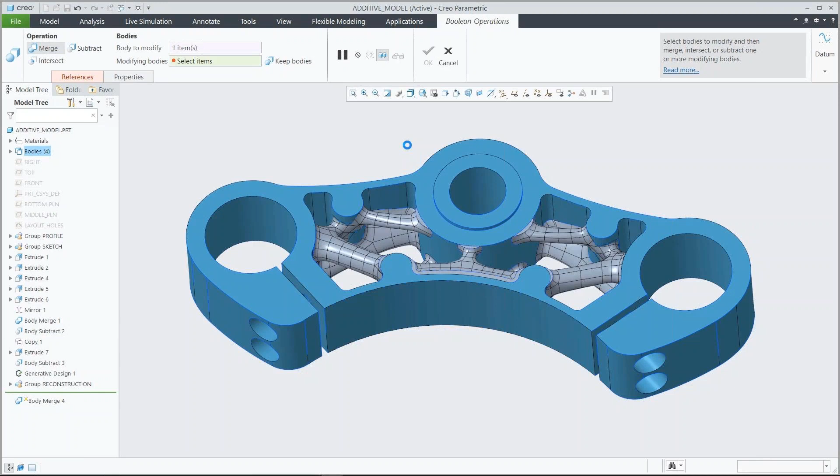Right, we can see now that Creo is starting to reconstruct all that geometry that we just went through and built out in the study. And now it's all part of that Creo model. And I can go ahead and add that right back in with my part. So simply just here using some Boolean operations to merge in our new geometry and add that right back in with the preserved geometry that we started with. And just like that, we have a solid Creo model that's ready to go.

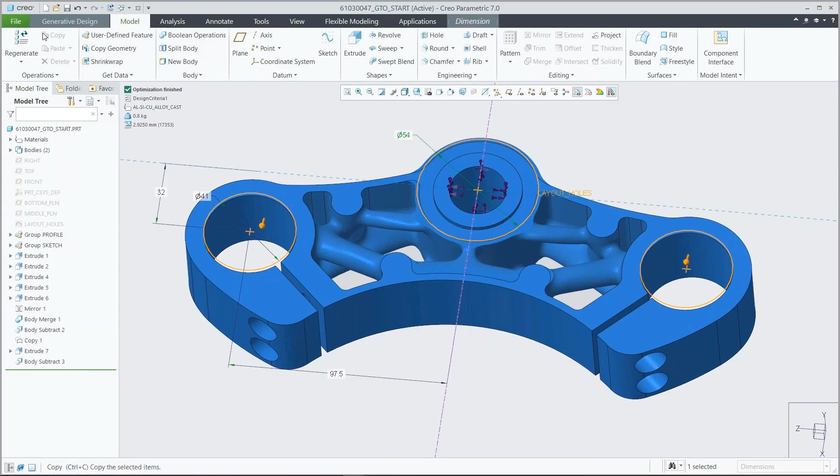But a lot of times what happens right now is we need to make changes, right? Maybe at this point the model changes, possibly that outer diameter moves. So does that mean now that I have to start my study all over from scratch? Well, no. We can simply just go back in and change around what our design goals want to be. Maybe switch up some of the design constraints. Maybe now that we've had the chance to review this, we now know that we don't have a 3D printer to actually create these designs.

Well, that's not going to be a problem, right? We can simply just add in any constraints we had before. And maybe now in this case, we're going to build this out as a linear extrude instead of leaving it with just that geometry that's only really possible using additive manufacturing. This is something that we can build out in all those different ways, right? In this case, we want to build it out knowing that we're going to be extruding this over in the shop.

Right, so go back in, redefine any of the materials that we're working with, and then go ahead and run the study. And before we do that, we can still go back in, change any of the settings up. We can change the fidelity, change up the maximum iterations that we want to run, and go ahead and let the system do its thing.

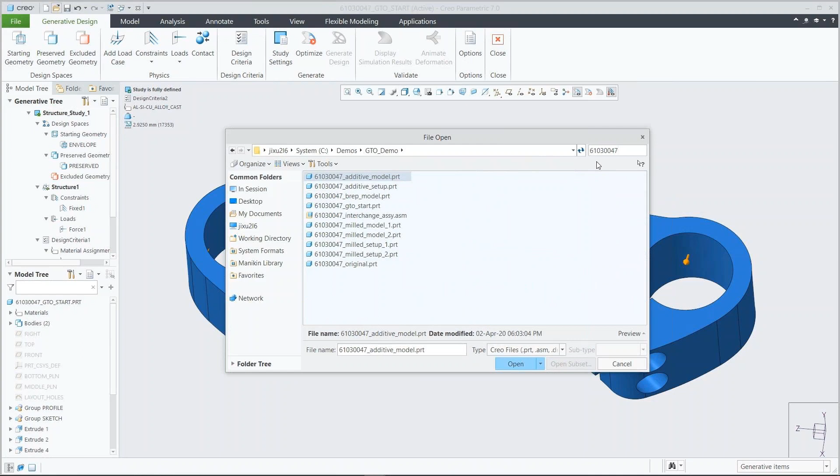In this case, I've already gone through and run this study before, so instead of running through again, we just go ahead into our File Explorer and open up the result that we got after converting to our BREP geometry. So taking a look at this, whereas before the design was really only possible using additive manufacturing techniques, this is another part that can be manufactured other ways, like extruding, milling, casting. So we can go ahead, add that geometry back in, and we have a part that's ready to go.

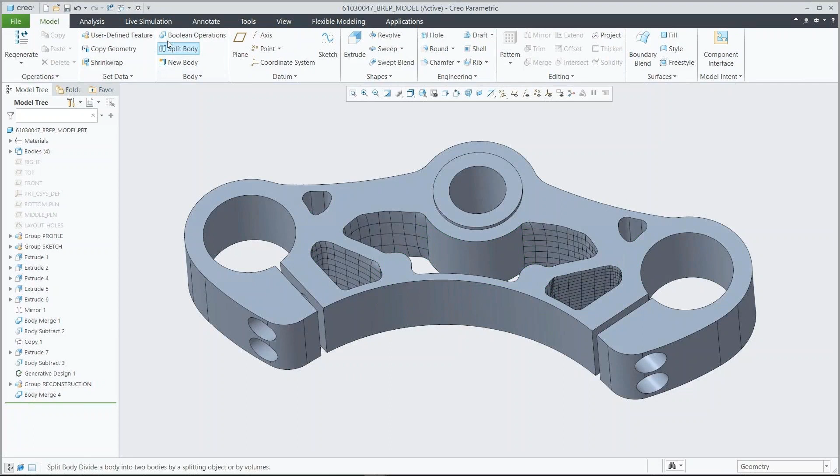This is something that now we could take back into our other simulation areas in Creo. So like I mentioned earlier, like we saw with Creo Simulation Live, that was more of a flow example, but there are a lot of different areas we can work in as well. So like here, we can do more of a structural study, where we're looking at different constraints, different load cases that this might be forced down by, and go ahead and run that simulation. And we can see, again, pretty much as soon as I click to run the simulation, we're getting results.

So I could go back and try out all different kinds of designs through generative, then reconstruct the geometry, take in any of those constraints and loads over into my simulation, and see what kind of results we're getting. So looking at what we got here, it's definitely different than what we would get working with the additive model. You know, deformation around those outer holes has changed. We can further animate on it to show that deformation if we'd like to.

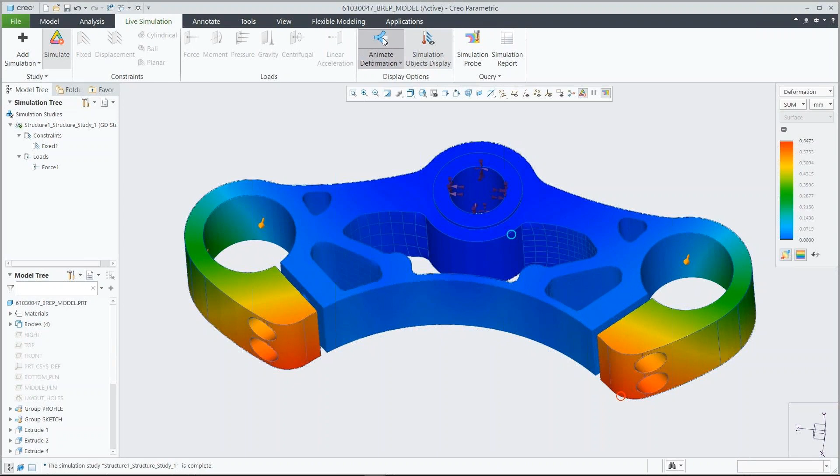And then we can go ahead and take that info, run more analysis if we'd like to, go back in, make more design changes, whatever you want to do. Take it in and really build out the part in the way that you want. So at the end of the day, you're using generative to create really innovative, but at the same time, structurally sound models throughout that process. A quick look through what that general design process looks like working in generative design. So I wanted to take you through what that looked like, but now I want to take a next step and take into a little bit more what we have with some of our other applications.

Moving on from here, we have a few new options over in Render Studio as well. First thing here is the ability to pause and resume during the rendering. Normally if you're in this mode, it's kind of constantly running by default. But now if you kind of know that you're going to need to make some changes, you can simply just pause that render, give the computer a break.

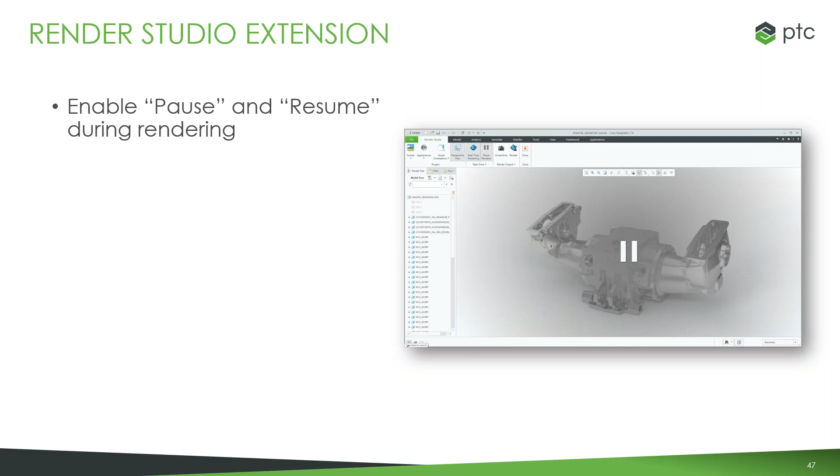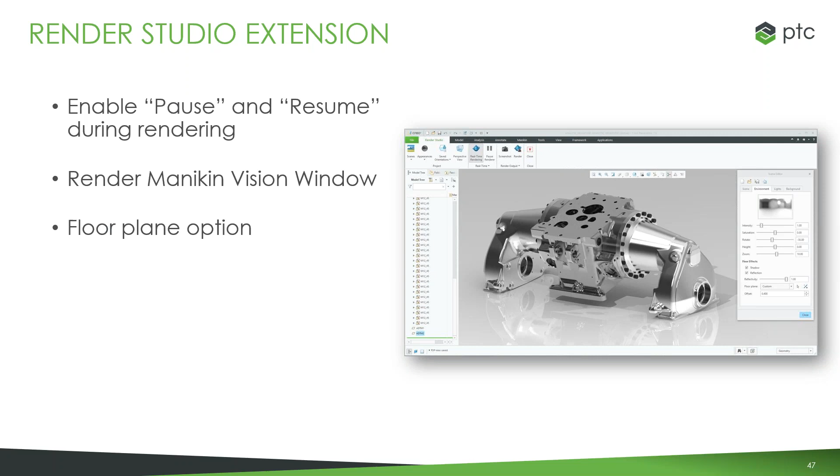Another awesome tool here is now being able to render the manikin vision window, essentially taking the view of what the manikin can see. We're able to render that view to get some really nice shots. We also have the option to define a custom floor plane for the render. Allows you to flip the model, change where the shadows and all the reflections are going to appear, and just in general, much easier to work with around doing that. So a couple enhancements over there in the world of rendering.

We also had improvements over in the world of augmented reality in Creo as well. And if this is something that you haven't worked with before, this is something that has been built out and really improved upon over the past couple releases of Creo. I think since Creo 4 it was introduced, and instead of just sharing out screenshots or sharing out the model and hopefully they're able to open it up, you can share it out in more of an augmented reality view, where you can simply just send over a code to somebody and they can simply scan it right on their phone and then see the model right on their desk.

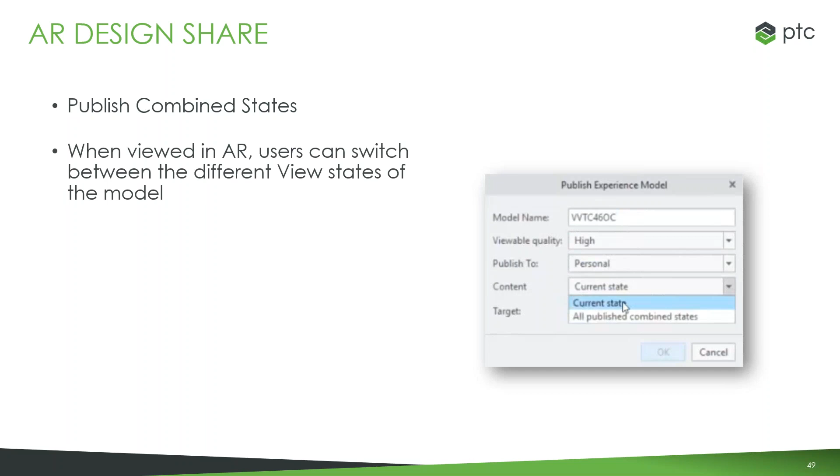They can scale it around, rotate, see different views of it, and we've really had a big stake in this in the context of Creo and how we share these designs out. And especially now with Creo 7, we now have the ability to publish different combined states as part of the experience. Those combined states can include exploded views, different section views, different appearances, so that can all be included now. And with each of those different states, the user can switch between each of those. So very quickly and easily switch from one view to the next.

And you have a lot of different view options whenever you're publishing over to Vuforia View. Vuforia View is our free to download, free to use application that we're actually using for pulling up and viewing those augmented reality experiences. So if that's something that you haven't worked with before, that's a base capability here in Creo, something that you're definitely going to want to try out.

And finally, I'd like to just briefly discuss some of the improvements in the EZ tolerance analysis tool in Creo, formerly known as the tolerance analysis extension. If this is something that you haven't seen before, this is a one-dimensional tolerance stack-up analysis tool. This is powered by one of our partners, Sigmetrix, and we're using this to perform these types of tolerance analysis on our Creo assemblies. Something that you can do right from the Creo design, works right from our annotations for our dimensions, tolerances, GD&T information, and as you make changes, have all those changes propagated to update your analysis data.

And so with this change, we've really done a lot to update the look and the feel of the tool, made it even easier and faster to do these types of dimensional stack-ups. We can define multiple different stack-up analyses right on that same model and evaluate a lot of different impacts from the studies. Look into things like statistical results, defects, worst case scenarios, RSS values, and then even checking which annotations or which tolerances have the highest contribution to those results that you're getting.

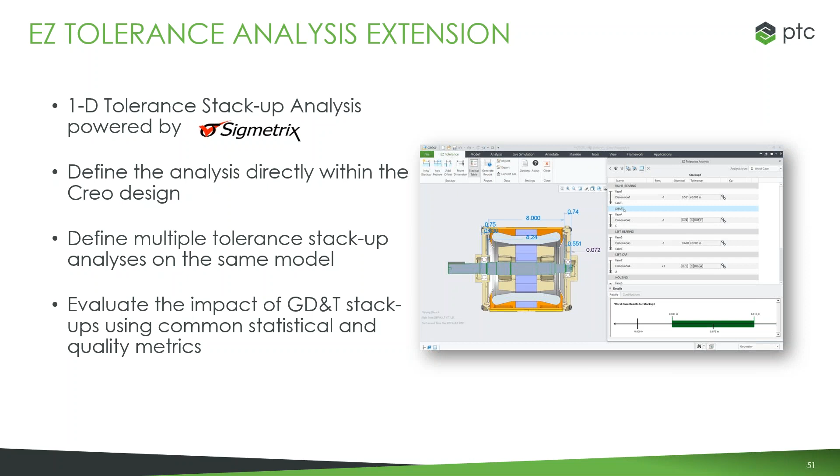And with that, that's pretty much everything that I wanted to go over in the context of what's new with Creo 7 today. So obviously a lot of different areas there, a lot of different applications. Maybe right now you don't work with a lot of that, or maybe you do, but don't work with all of it. I'm trying to give a little bit to everybody here and open up your eyes to working with some new different things here in the context of Creo.